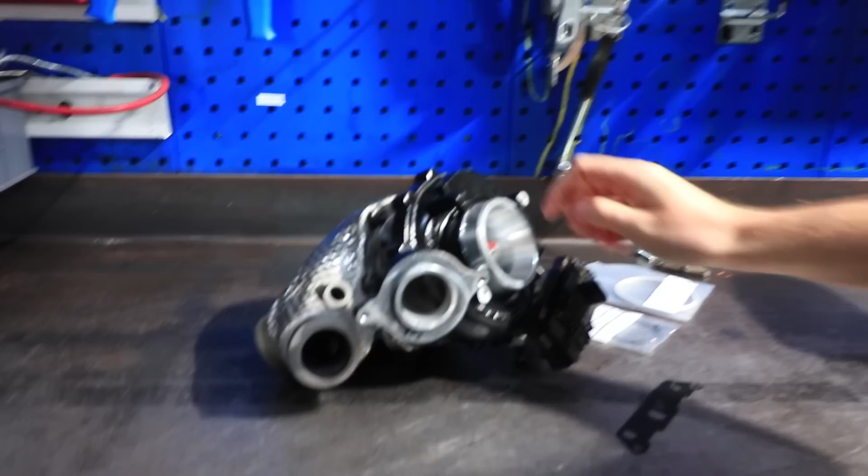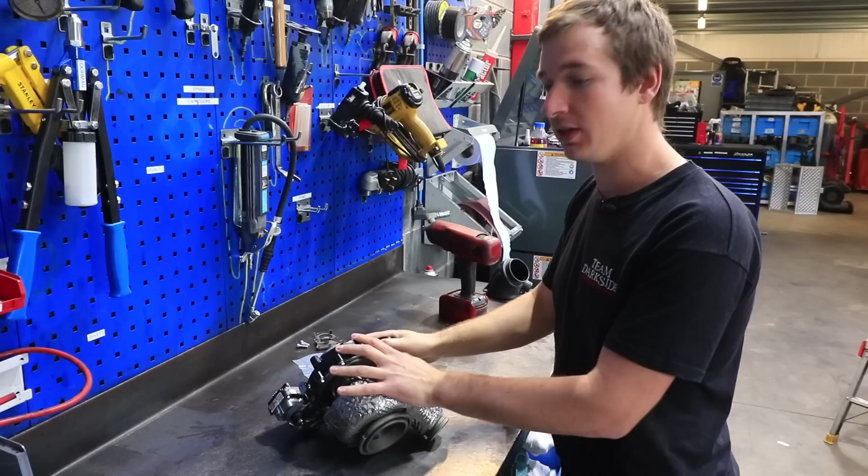So Owen's working away now to take the 2263 off, and then we've got this to go on, which we've seen before and talked about before, but this is the GTD 2872 VRK or VRZK, whatever. We've got loads of different designations for it, but this is ball bearing. It's water cooled, but it's had a ball bearing core put in it. Bigger turbine wheel.

Oh, do you want to look at that again, Danny? I didn't get into it.

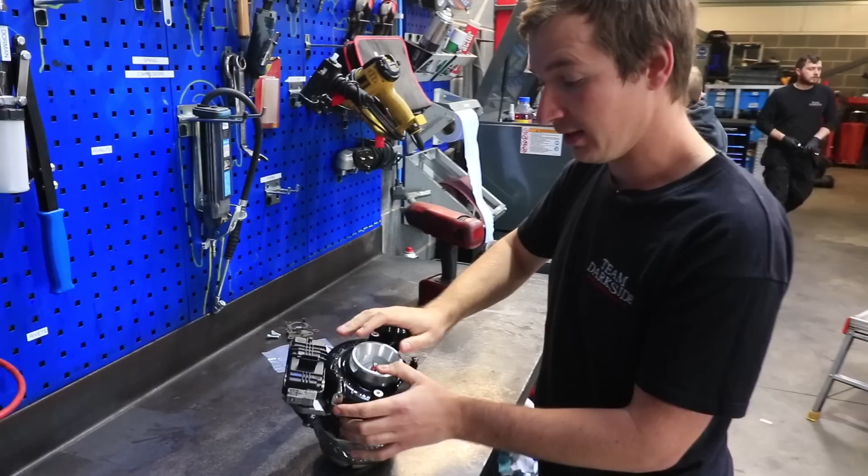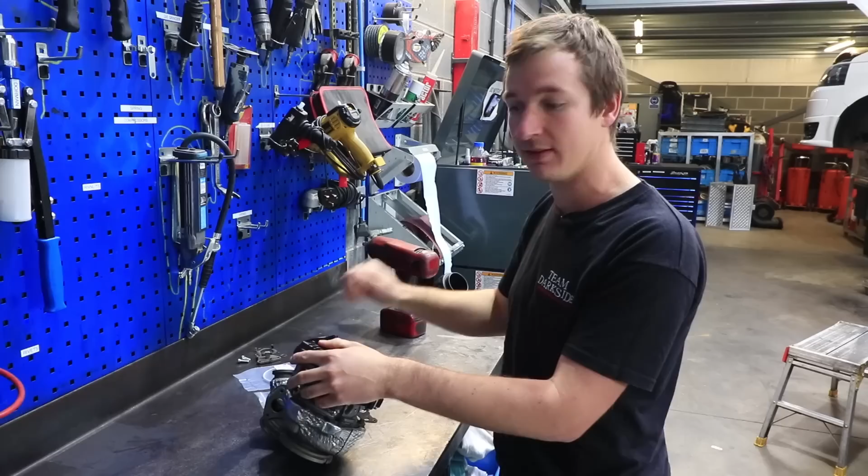So, compressor wheel, obviously 72mm exducer. It's a 50-52 inducer. So it's pretty big, and the turbine as well is a lot bigger than the one that's on there. But what we found with these turbos on most cars, they spool pretty good anyway. So we're going to get this whacked on, and we're going to see where we get from where we were with the 2263, the charge temps in and out.

I think we're going to max this out before we get to the intercooler, so we'll slot that in between as well. So we'll get as much as we can with the standard intercooler, but from talking to the guys in Australia that we work with, we send a lot of parts to them, they reckon we're not far away from where they've seen intercoolers running out of puff, and it never hurts to have too big of an intercooler anyway. So even before this point, I'd be putting an intercooler on if it were my truck, but it's good to know where it is and what gains you can see when you do it.

So we'll get all this thrown on, and then we'll get onto the dyno, and once we've done the dyno, we'll get onto the road, and hopefully by then we've got the water injection on as well, so we can do a quick flick of a switch and see what difference it makes to smoke output and what have you, and if it makes any difference to power. So see how we get on.

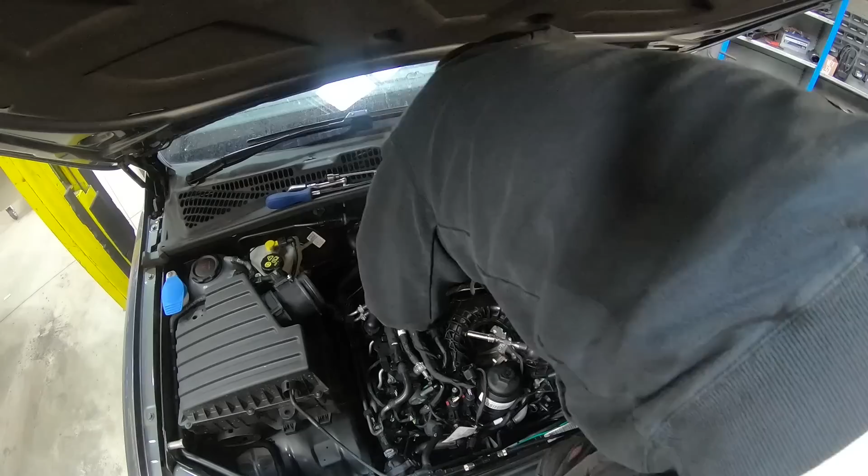So we finally got a chance to get the turbo fitted to the Amarok. We've spent a fair bit of time trying to get exactly what we wanted out of it. It's been a bit of a pain, to be honest, like everything has been on this project, but that's what happens when you're doing brand new stuff. It always ends in a bit of pain, but if you get the result you want, it's not a big deal. So we've looked at the logs, we've looked at the fuel and everything.

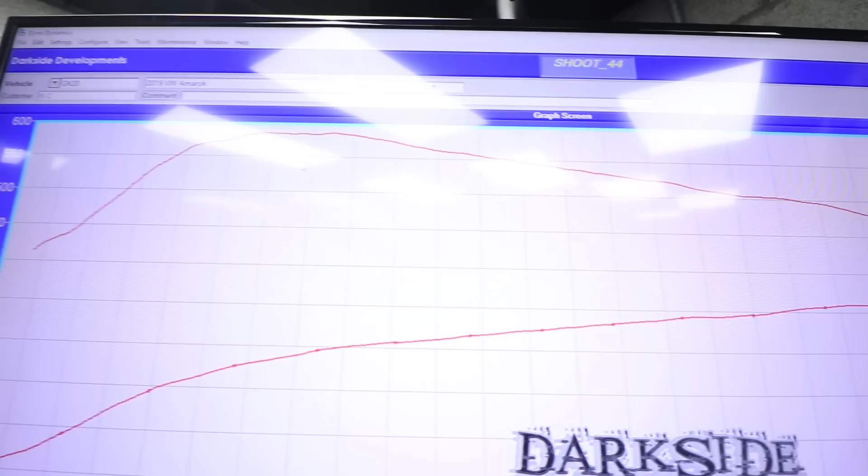We think there's still a little bit in this, but one thing we have noticed is at this power, if you're swinging, Danny, so 359 and sort of 580 foot-pound of torque there, something thereabouts, we're struggling with the inlet air temps. So we've got an intercooler. We'll see if we can get that fitted and see what difference that makes, because that's definitely not the limit of this turbo. So fingers crossed we get a little bit more out of it.

So the Amarok's not on the dyno at the minute because we got a little bit rushed, so we had to get it off and get something else on there. But we've got the 28 turbo on there, obviously not quite pushing it as hard as we want to just yet, but the one thing we have noticed, the inlet air temps are creeping up a little bit higher than we want them to be. They were getting higher before, but not dangerously so, and we were getting the power that we needed, so we weren't too worried.

But now we've got goals of sort of knocking on 400 horsepower for this, which the turbo should be fairly easily capable of, but we're stuck at like 359 and just less than 600 foot-pound of torque. And I would like to get a bit more, but I don't want to push the turbo any harder or the rail pressure or anything like that while we know we've got a problem.

The back pressure's not the problem, obviously we've not got a problem with that at all. The throttle valves, they're not giving us any trouble now, but the intercooler's showing, I think we're at 70, 80, if you want to push it hard and get 90s. So it's quite high. When we get them sort of figures on like the Polo, Fabia, Ibiza, like the old 1.9s or the newer 1.6s, putting an intercooler on them gives them 15, 20 horsepower sometimes.

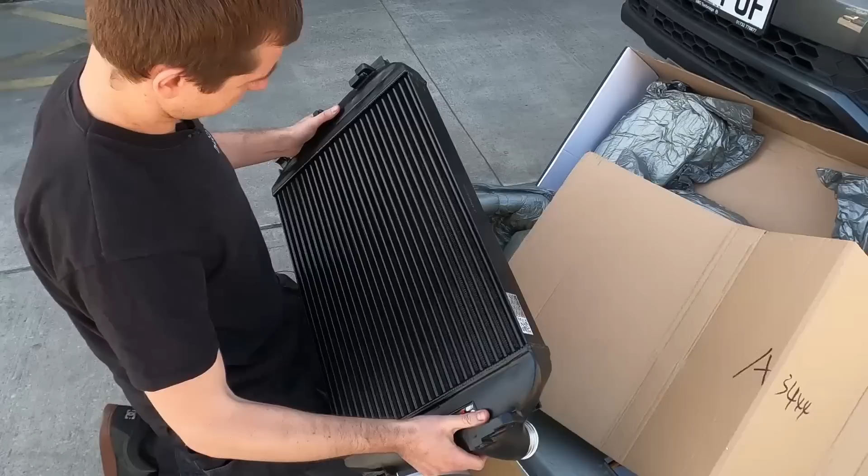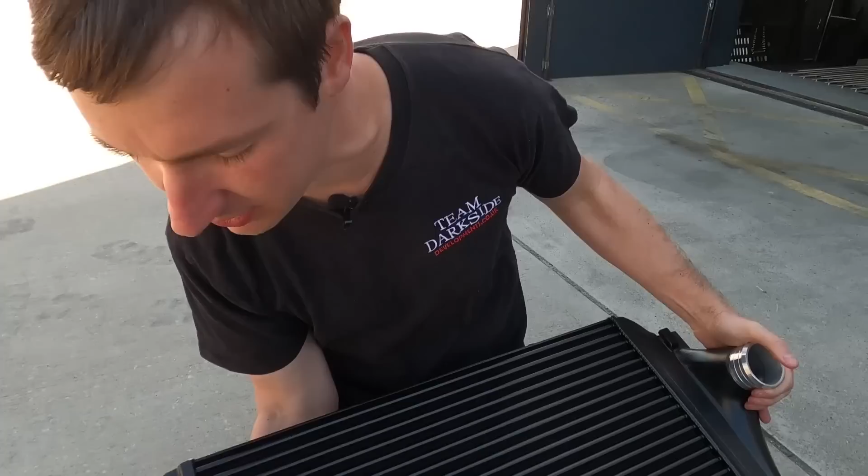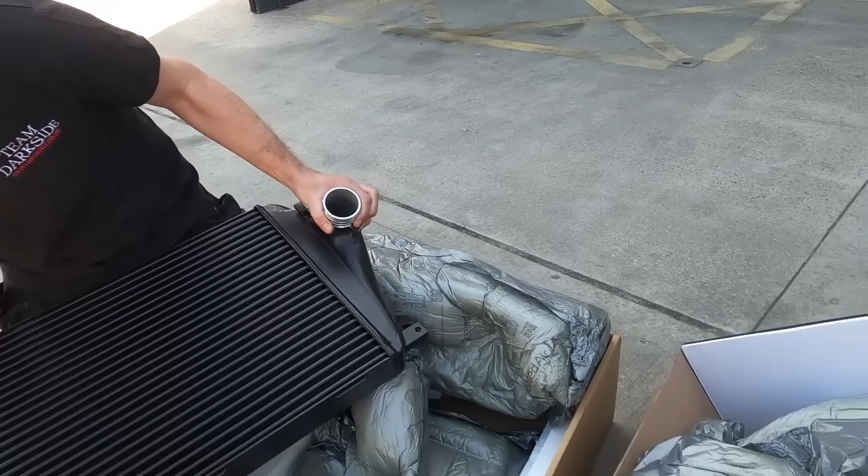So we've got a Wagner Tuning intercooler, so let's rip it apart and have a look, see what it looks like. So yeah, this is a nice core, pretty big, nice connections and all, ribbed for her pleasure. It's got some nice little fins in there to try and direct some of it down to the bottom, because it all just wants to go around the top. Little sensor boss there, which I'm assuming is an intake temp sensor, which it will be. I think there's one on both sides on this as well, which we need to check the logs for.

But yeah, Danny's having a job trying to stop cardboard blowing all over.

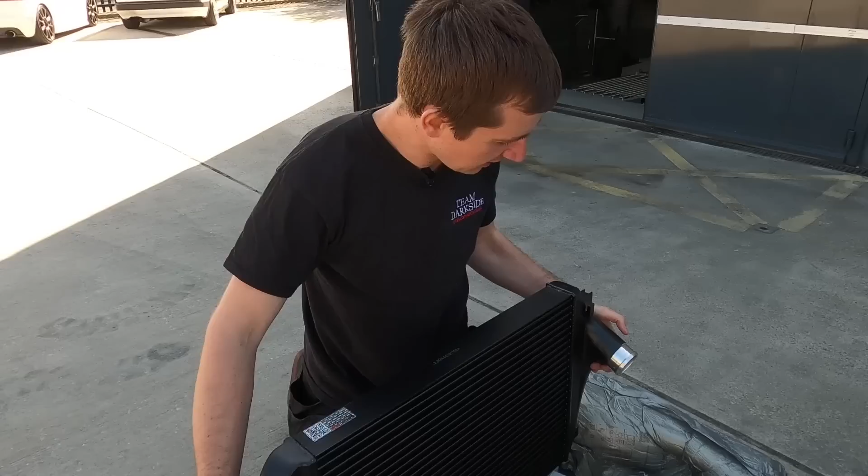We'll try and get some videos during the install. Andy's going to do that tomorrow, and hopefully we can get it straight back on the dyno. I did want to do this while it was on the dyno, so we haven't got the strapping, unstrapping and everything, but it didn't time out nicely, it wasn't going to work. We sort of got to the limits of where we wanted to get as we are, so I'm hoping, not going to quote any figures just yet, but it'd be nice to get a fair few horsepower from just doing this, and a decent, significant EGT drop, which means then we can put some more fuel in there and get a little bit more power.

So let's get out of this shade, it's freezing, even though it's nice and sunny out there, and yeah, we'll get cracked on.

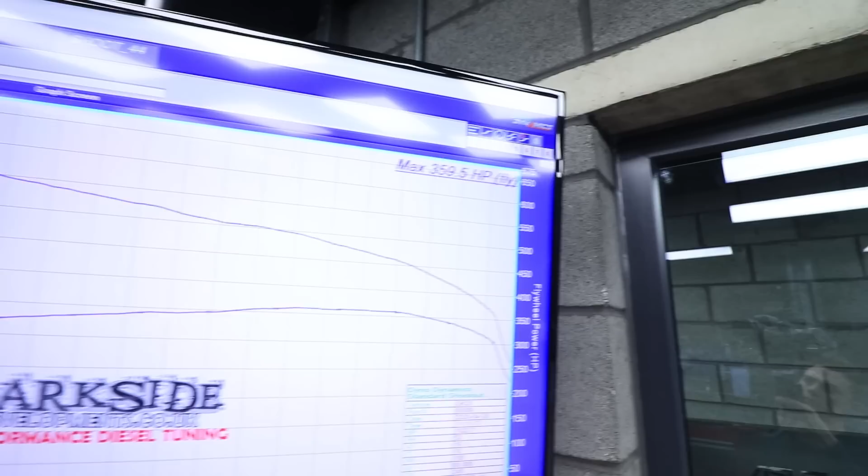So, Andy finally got the intercooler sorted. It's not that bad a job really. I think 2.5 hours, something like that to do. A few bolts had a bit of Loctite on them that were a bit of a pain to get out for some reason, but it's sorted. That's on there. So last time it was on the dyno, this is what we had: 359 and 580 foot-pound of torque, something like that. Charge temps were getting up 75, 80, 90, depending on how hard you run it, you could get them pretty close to 100.

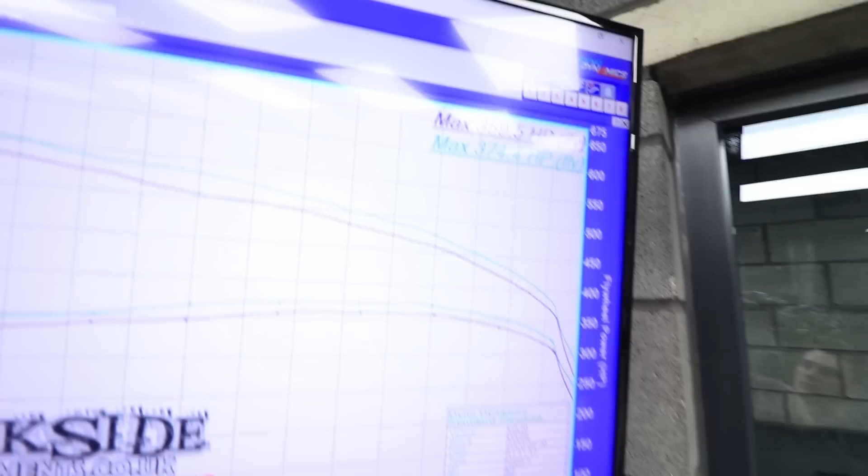So this is the net gain that we've seen just literally bolting the intercooler on. So it's 15 horsepower more, and the charge temps are down around the 30, 40 mark on the dyno. On the road we couldn't get them past 30, but on the dyno 30 to 40 depending how hard and how hot you got it. So quite a significant difference, and obviously we're not in the hottest country that these are sold in. A lot of people in Australia will be pretty happy to see decent gains like that when it's 40 degrees and quite humid outside.

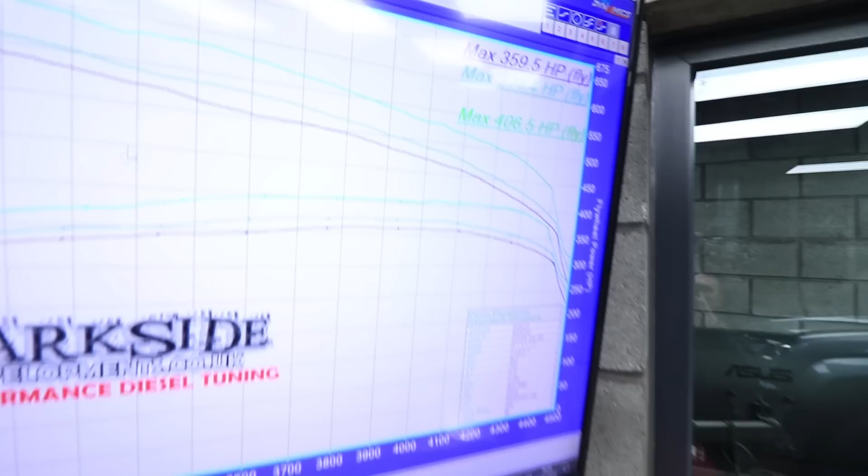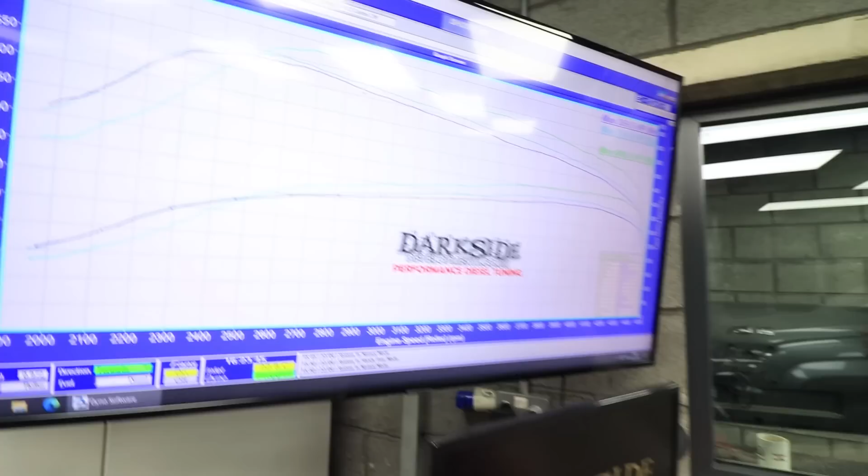So not sure why it seems to have lost a little bit of bottom. It only seems to be on the odd couple of runs that it seems to do this. I think the stabilisation time's been tweaked a few times, but we'll do that. It's got to go back up the dyno again anyway. We've still got the water injector to put on there.

So this 406 horsepower, that came with a little bit more rail pressure. We put the 2700 bar rail pressure sensor in there after we'd done the intercooler test, and now we bumped the rail pressure up a little bit more than we normally do, because normally you can only get 150 bar extra because your sensor can only read 200 bar more than standard rail pressure, 2000 bar on the standard 2200 bar sensor. So put a 2700 bar sensor in, and I believe that's running about 2300 bar, so it's a decent increase, but these injectors should be able to take it, the more modern stuff. They're getting up to 2500 bar setups now on these, so should be fine.

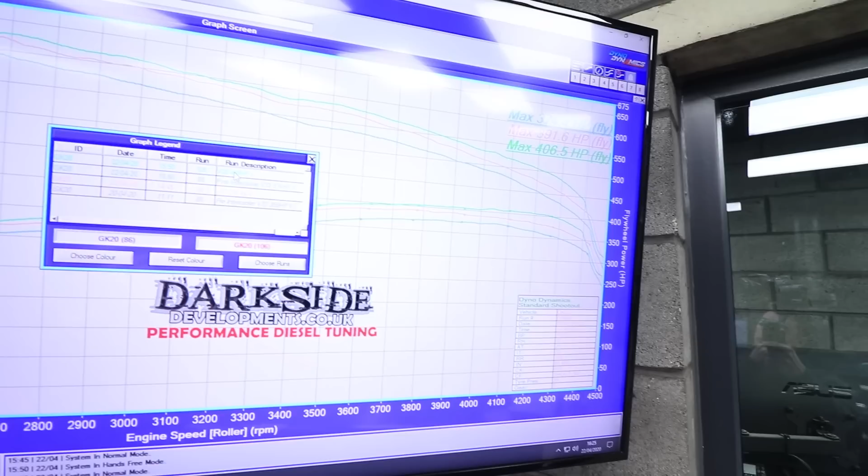But the one thing we have noticed, it was pretty okay, sort of getting up towards 900 EGTs thereabouts during a pull, but when you put it on a long pull that sort of simulates like a fifth gear pull on the road, it got a little bit hotter than we want it to be, and obviously there's no point melting this just in the pursuit of horsepower. So we made another tune, which I'll just hide them one so you can see. But you can see the difference in them there.

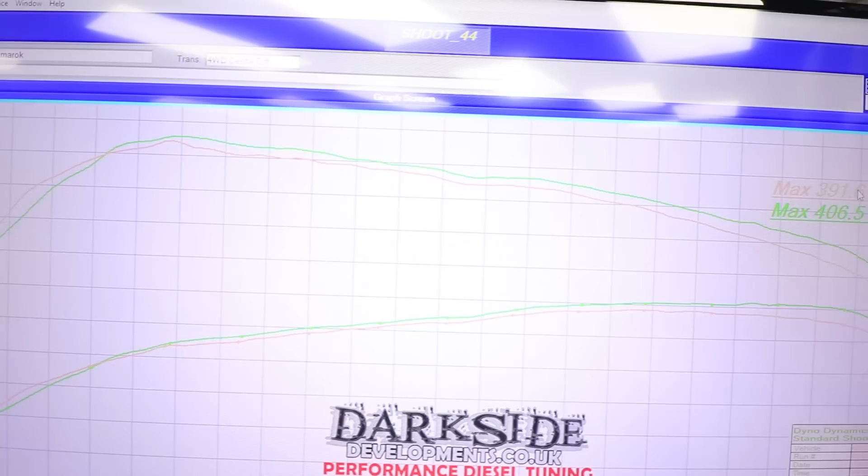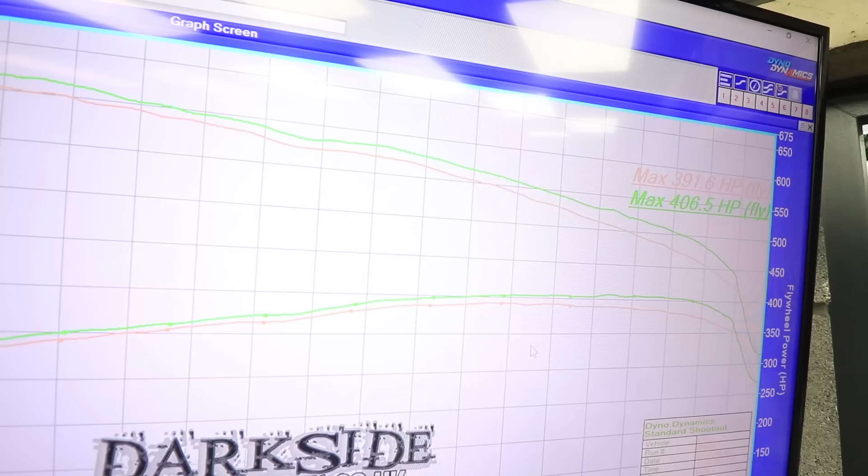So we've gone from 406.5, we've dropped a little bit out of it, took us down to 391. The majority of it is at sort of above 4000 RPM where this starts to get quite hot, and a little bit everywhere else, but it's not a ton different. So it should still drive very, very similar on the road. Obviously, you're not going to notice that much difference, I wouldn't have thought anyway. But it's going to be a lot safer.

So, although the customer did want the 400 horsepower on diesel only if possible, I think with the limitations that we're setting in place for the exhaust temperatures, the injector duration, the rail pressure, all that sort of stuff, we don't really want to go any more powerful than that. I'm sure people will push them harder. If it were my own car, push it a bit harder and just see what happens to it. If it melts an engine, then it's my fault, I've got to change the engine. But when it's a customer's car, you can't do that.

In our terms and conditions, although I believe they're pretty tight, if something blows up in the pursuit of getting power for a customer, it's their fault. You're still wide open for somebody to say they weren't there pushing your finger on the plus button telling you they wanted more and more power. So it is what it is. I think this is pretty good still. Like I say, it'd be nice to keep the 400, but let's get the water injection on there. Let's see what power we can get.

I don't think it's going to make much difference because I don't really think we're quite on the edge of the fuel pump or the injectors as such. We're getting plenty of fuel. Just the thing with meth, you probably don't get the fuel exactly when you want it because obviously it's not timed. It's just going in when the air goes in. So we'll see what we can do. I'm not hoping for miracles. If we could just tip past 400 with water injection, have like a 30% methanol mix or something like that, that'd be absolutely perfect. I think the customer will be very happy with that. Hopefully he's happy with this as it is anyway.